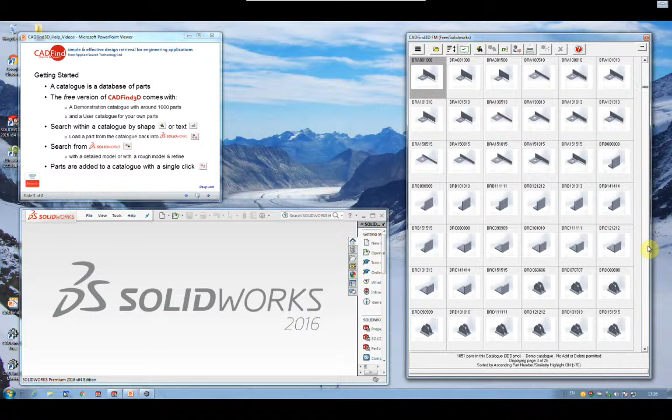You can highlight a part, perform a search, and the system will, instead of displaying part number order, display in similarity order. So the system thinks this part is 83% similar to this one. But that search was done within this demo catalog, which is about 1,000 parts.

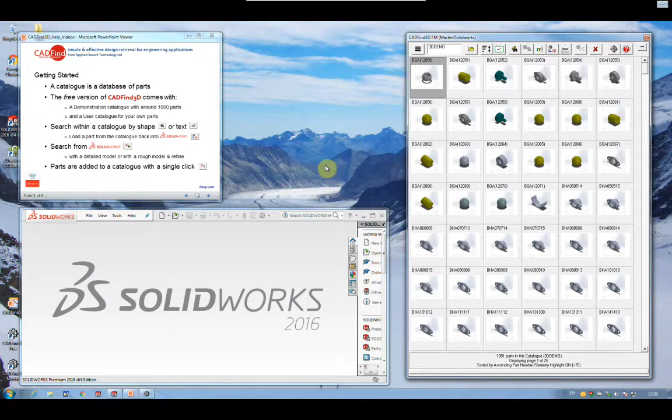So I thought for the purposes of the rest of this demonstration, perhaps use a bigger catalog, and that means I have to load the next version up of CADFind, which is the CADFind Master System. This is a licensed version. CADFind remembers what catalog you last used, and that's why it's opened the demo again.

Notice it didn't give us the choice of just the two catalogs. That's because we can open any number of catalogs here. I'll open this new one. But I can also open any number of catalogs at once. So I've got the user one, 3D demo, or the new one.

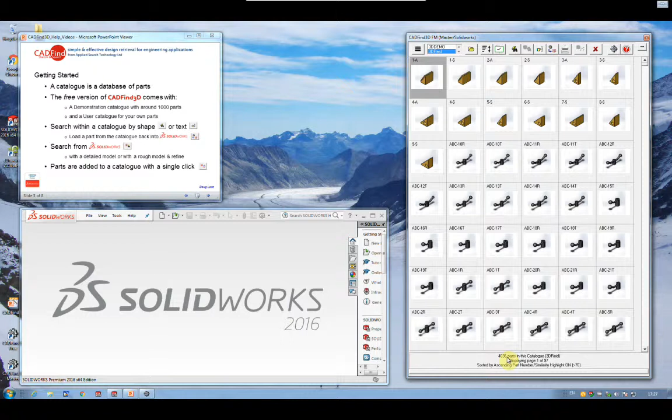This catalogue has 4,000 parts, rather more, and is perhaps more representative of the sort of thing that smaller companies use. You can have up to 100,000 parts in a catalogue and still have reasonable search performance. Obviously the number you do have depends a bit on how you want to split your catalogues up. But, anyway, this catalogue has 4,000 parts, and so I thought I'd show how it performs in typical text and shape searches with that number of parts.

Of course, the way that people would traditionally search for parts is using text, and CADFind supports that. So we can do a search on the description of the part or on the part number itself. I'm going to cheat a bit and look for a part number that I know is in the catalogue. So if I click the search button, the system will come up with, here we are, ABC1T. That's given a 100% score on the similarity index that CADFind calculates, because it's an exact match to the text that I typed in. I could have put wildcards in and so on, of course, to make the search more flexible, but you can see that these parts get slightly lower scores because they've got one character different.

Text searches can be effective, but they depend greatly on the accuracy of the description, and some descriptions are very generic. If something is called a bracket, there are likely to be loads of parts in the company's database called bracket, and there will be many different shapes and sizes of bracket. So searching on the description is often not effective because of the ambiguity of the definitions that people have to use.

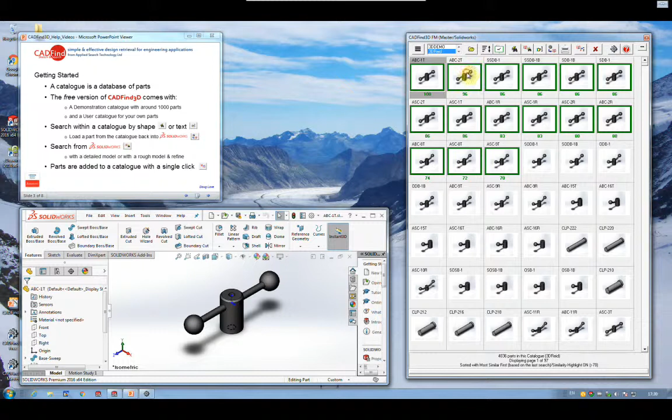The way that you'd examine them is, of course, what you'd want to do is look at them in your CAD system. So if we right click, I can load the part into SolidWorks. There we go. And I'll load this second one as well. And while I'm at it, I'll load the third one.

And if I tile these and then tidy this display up a bit,

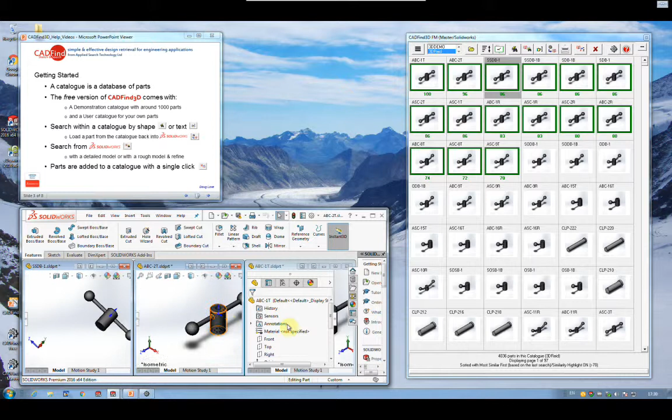This was the part that we were using as our master, or the one that we wanted to match against. So what we were looking for were parts like this one, which is the one with the highest score, 96, and you can see actually it's remarkably similar. The shape, all the shapes are similar right through the part.

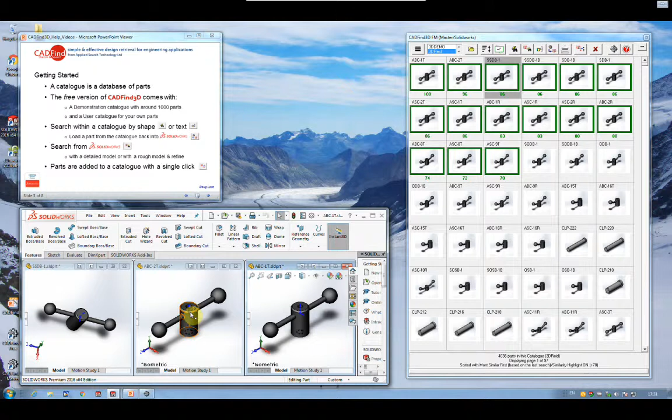It's likely that the only difference, the reason it didn't get 100%, is that the size is slightly different, some dimension somewhere is a bit different. But you'll notice this item, which got 86, quite a bit lower score, is different, maybe because of size, but almost certainly because there is no through bore. So you can see in these parts, these two both have through bores, this one doesn't.

And that illustrates how CADFind works, that what it's looking for is a match on the shapes but also on the size. So it's that combination of the two which makes CADFind very effective at finding matches.

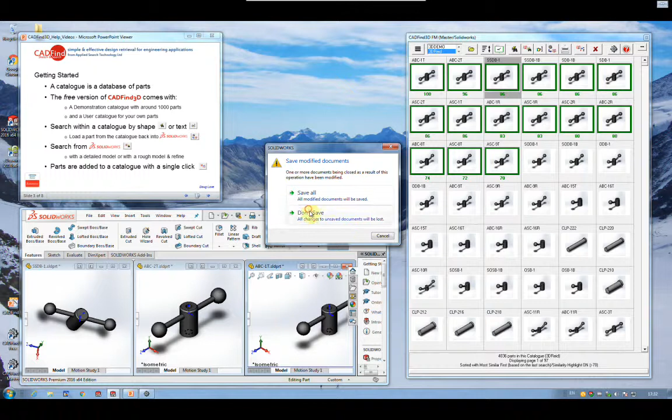Of course, it's not always the case that you want to search from within CADFind. It's actually quite a lot more likely that you would want to search from within the CAD system itself. So if I just go back to my examples,

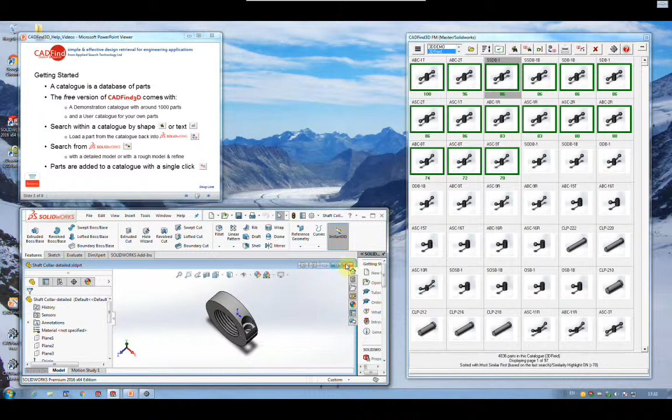I've loaded a part which is a completely detailed part. Maybe a customer has sent us a model of the part that they want us to supply, and we want to see whether we've got anything in our database like it. So we want to search our catalogue using this model.

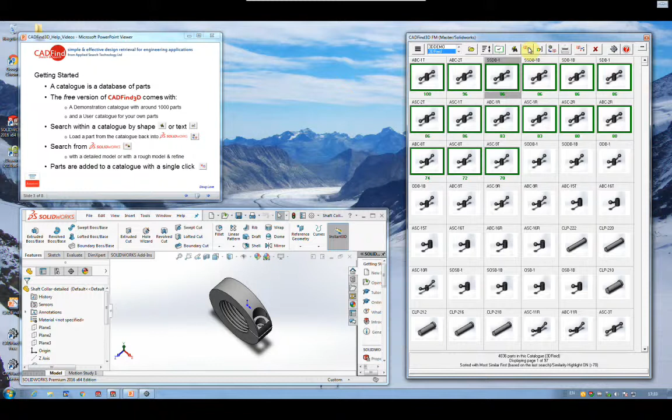The system works in much the same way. You click a single button, it searches through the database looking for matches in just the way it did when we did the one just now. And you can see that there is a perfect match. There are also a number of parts which are not perfect matches but pretty close. In fact, the whole page looks pretty close.

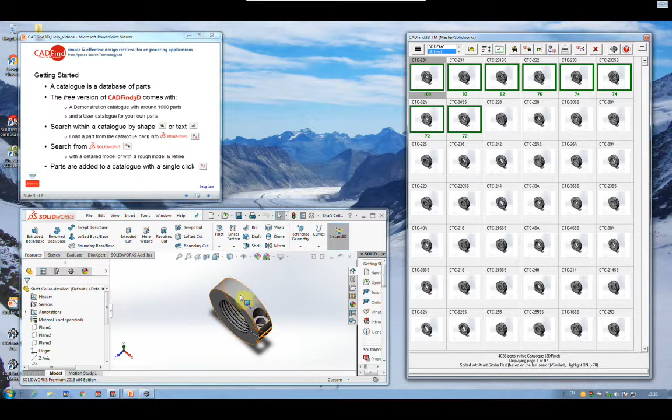The only issue with this is that this is a detailed part, and if the part didn't exist already and I was having to create that in order to do the search, that would of course be rather inefficient, to say the least. So it's worth noting that CADFind can also operate with simple models.

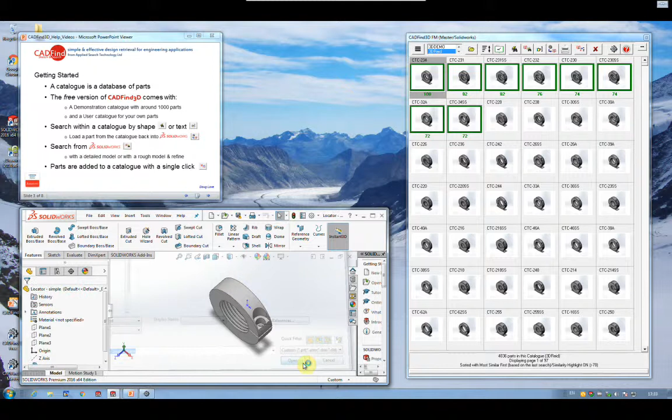So in this case we have a very simple model. We search in exactly the same way, click the same button, and this time the system has come up with some matches. Now these will be closest to what CADFind thinks the geometry of this simple model are, because it may not be the case that that is actually the part we want. It may be that this one down here is the nearest on that page, or maybe we might have to go to another page.

If we highlight that one that looks like the best match so far and click a search within the catalogue, you can see it then picks up a whole load of other ones that may be suitable. And as before, we can load them back into the CAD system to see whether they are.

Coding of parts themselves, adding new parts to the database, is actually very similar to the searching. We basically load the part. Let me just go back to my coding example. Here we are.

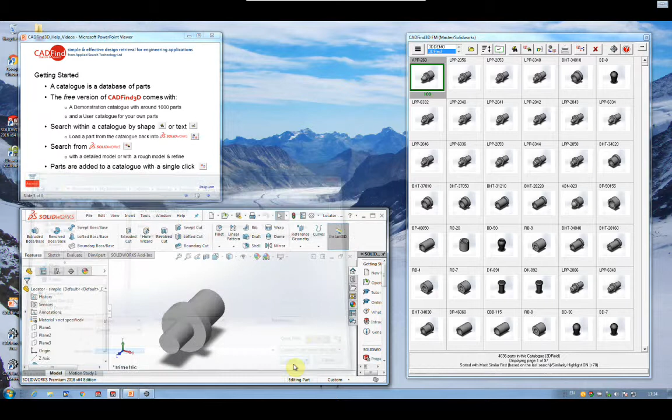And this time we don't do a search, but we do add. CADFind examines the part, extracts information about its shape and its dimensions and so on, and then adds that into the catalogue.

That means that this part could be loaded back into SolidWorks at some subsequent date if we want to, or we can use it for searches, or of course it can be found by searches. In this case, once it's added the part, it also does a quick search for anything that's like it, to see if there is anything that's like it already in the catalogue, and this time it actually has found something. So if we expended a lot of energy drawing this part, we didn't need to. We could have simply used QK5.

And that in a way is the essence of reuse. That is, we need to be able to find whether there's an existing part that we can use as it is, or whether we need to make some minor modifications to be able to reuse it.

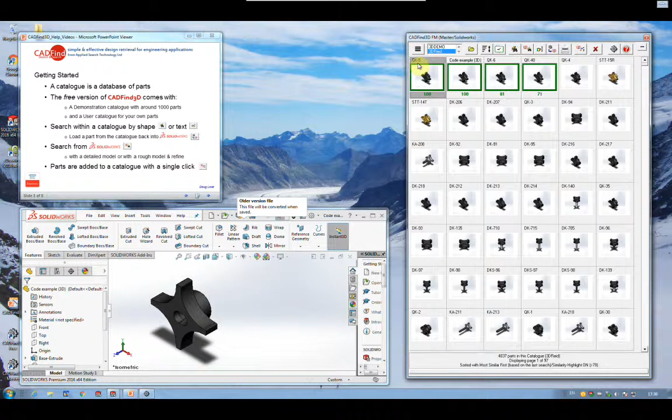Okay, well, I think that's essentially it. That's the basics of using CADFind. That's opening a catalogue, adding parts into a catalogue, searching it either from within the catalogue itself or from the CAD system, and then looking at loading it back for reuse or standardization. Okay, thank you.